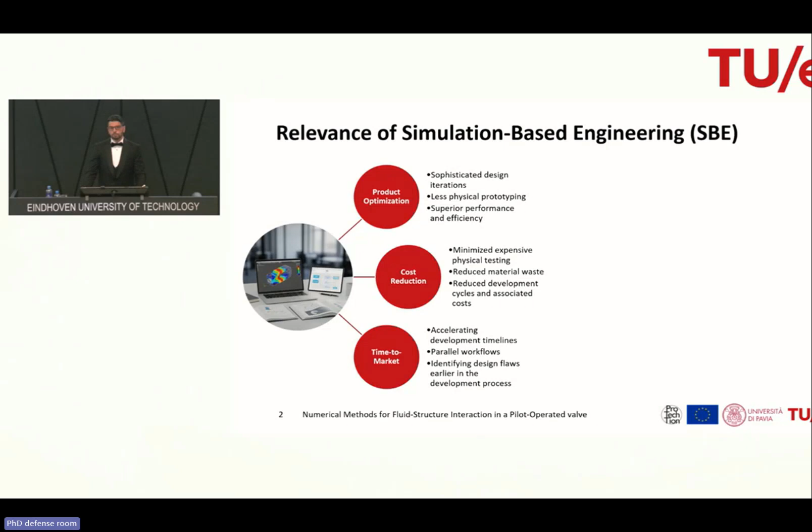Simulation-based engineering has transformed industry by complementing research and development with powerful computer simulations. It allows us to optimize products, reduce costs, and shorten time to market. Its impact on the technology and the economy has been increasingly profound thanks to the evolution in computing capabilities, the emergence of data science and AI tools, and the development of sophisticated data analysis software.

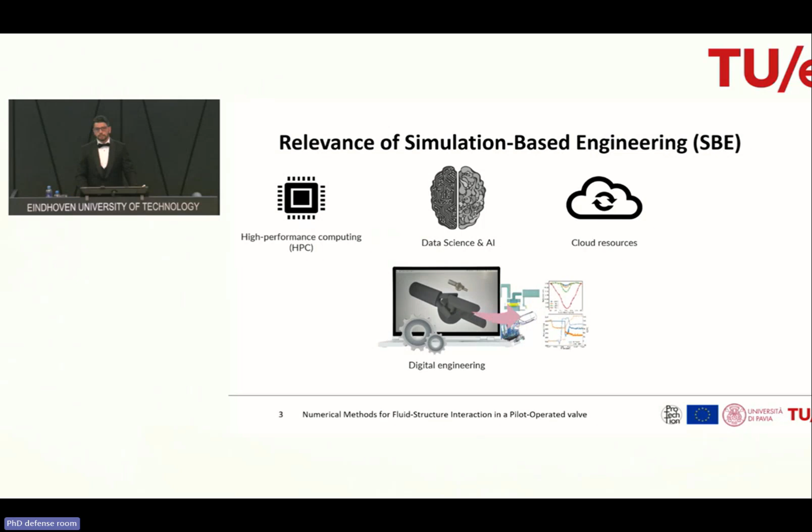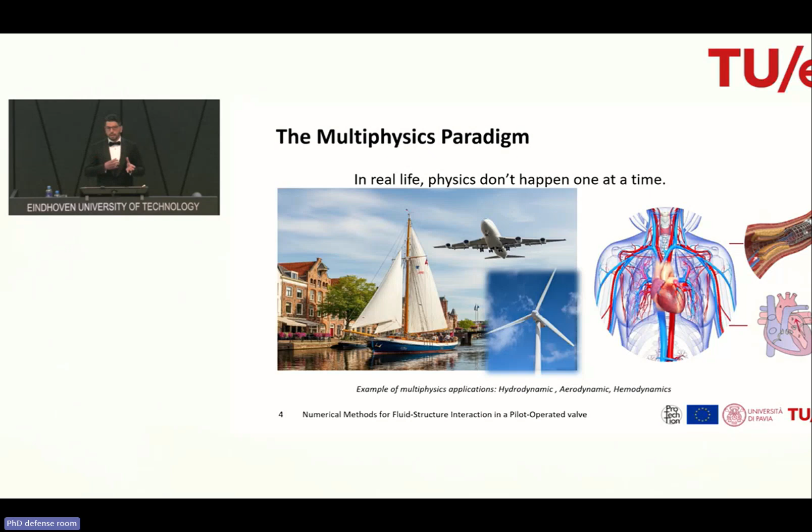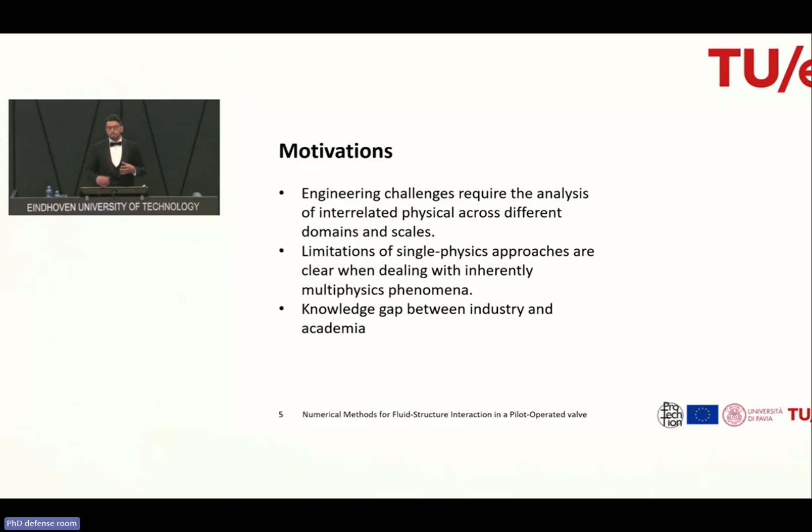However, while it's mature for single physics problems, its potential in multi-physics applications is still not sufficiently exploited. Integrating different physics, such as fluid dynamics and structural mechanics, poses unique educational, technological, and organizational challenges. The limitations of single physics have become increasingly evident as researchers tackle complex problems in fields like hydrodynamics, aerodynamics, and hemodynamics. Moreover, there is still a significant knowledge gap between industry and academia in applying these complex simulations. For all those reasons, my PhD was part of a broader European initiative to bridge this very gap.

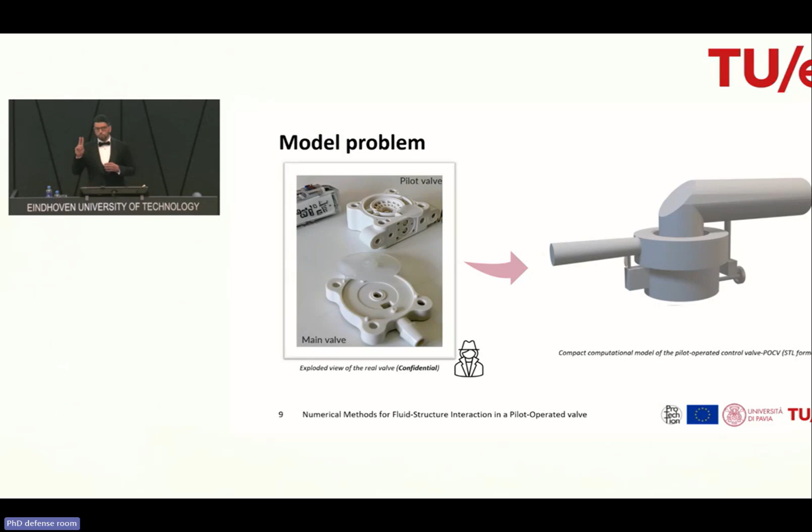My research focused on a specific complex multi-physics application, a microfluidic pilot-operated control valve, or POCV for short. In this valve, a pilot region controls and actuates a main larger valve using a shape memory alloy actuation mechanism integrated within an electronic device. Its development intends two modes, the proportional and the on-off mode, making it an attractive option for tasks like dosing, dispensing, and mixing. This tiny, high-tech component is critical in fields requiring precise fluid delivery, from medical diagnostics to food and beverage industries.

However, while this valve is working perfectly fine in the on-off mode, it failed completely under the proportional control mode. It experienced severe vibration, making it unstable and unusable for its intended purpose. This raises the following questions. Where does this vibration stem from? And can we use numerical methods to address it?

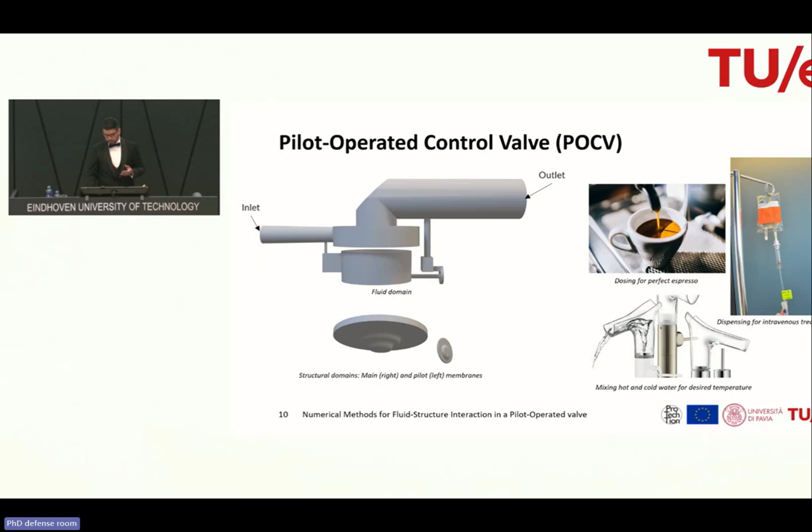To answer these questions, I set twofold objectives. Objective one consists of the development of suitable numerical methods that can faithfully simulate the fluid, structure and contact interaction within the POCV. Objective number two consists of leveraging these numerical methods to understand and potentially mitigate it.

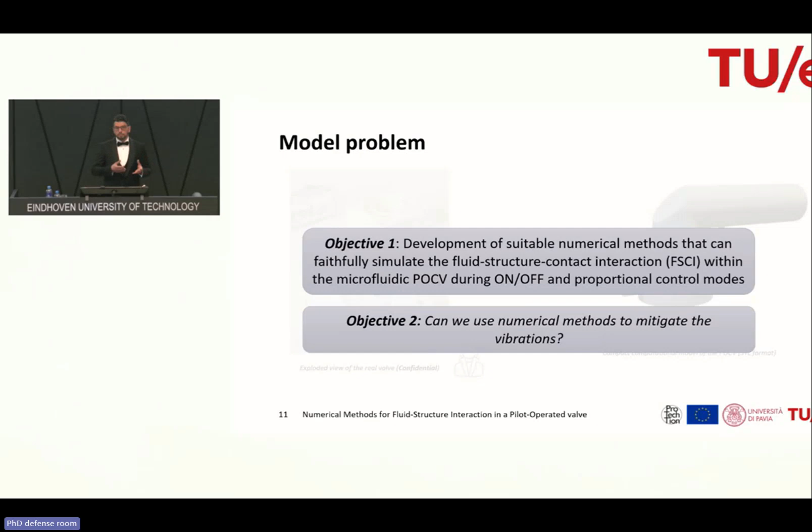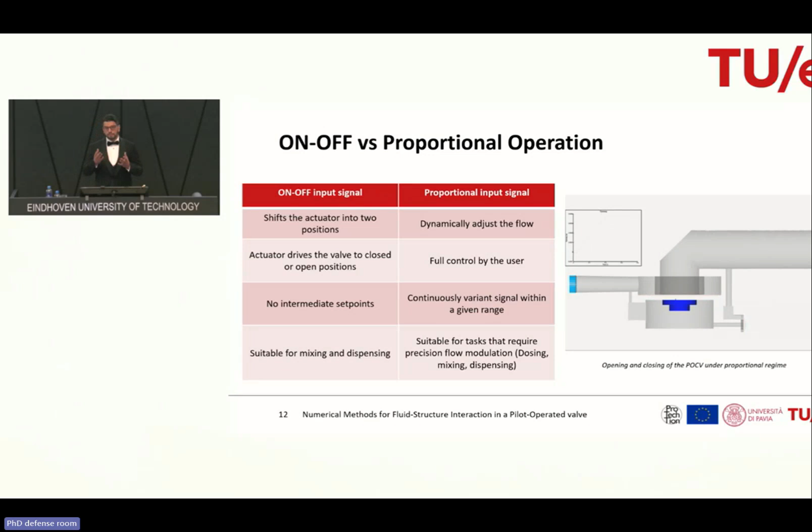Now, first, let's clarify the difference between the on-off and the proportional control. You see, the principle is quite simple. As the pilot valve opens, it releases pressure, creating a pressure imbalance between the main and pilot regions, thus opening the valve. For the proportional control, a continuously varying signal dynamically adjusts the flow as desired by the user. Hence, the valve can occupy any position between the fully open and the fully closed set points.

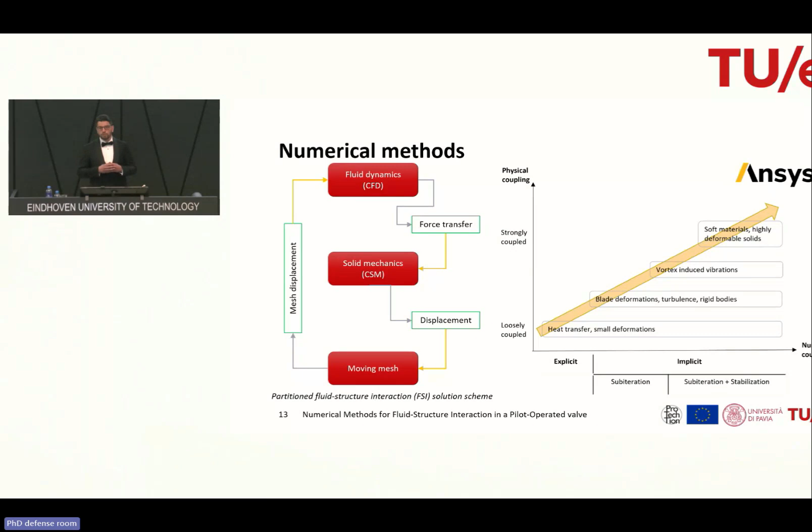For my investigations, I developed a numerical model using a method called the partitioned fluid-structure interaction approach, or FSI for short, within the ANSYS software suite. This came with big challenges, as this method had to account for the strong coupling between the fluid flow and the large structural deformation, as well as the contact between the membrane and the valve seat, not to mention the high computational cost associated with simulation runtime and the post-processing of hundreds of gigabytes of data.

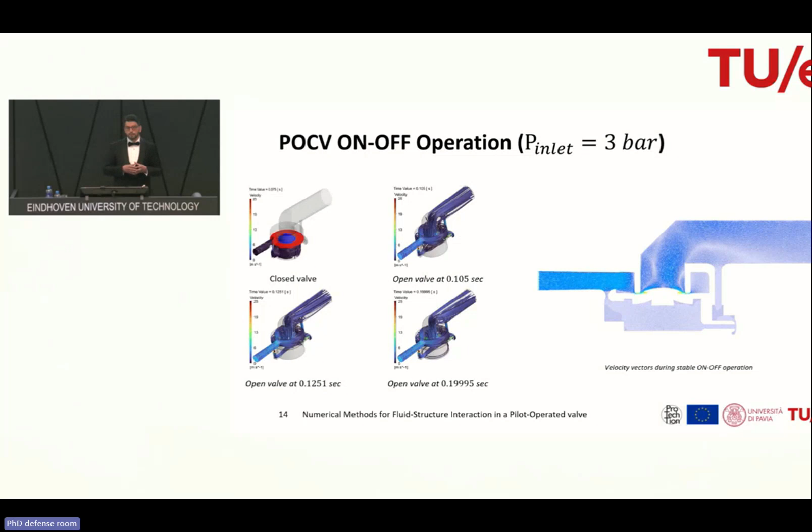My model first validated what was observed experimentally. In the on-off mode, the valve worked flawlessly, and my computational results were aligned with experimental data. But when I simulated the proportional opening, the failure was immediate. As soon as the valve tried to open partially, it started to oscillate violently.

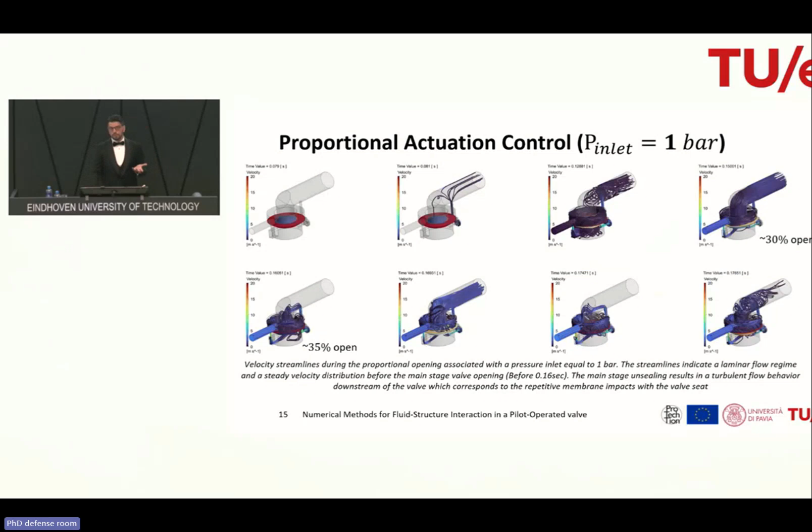Simulation could see what experiments couldn't. The instability was caused by a Venturi effect in the narrow gap of the partially open valve. To put it simply, as the fluid rushes through this narrow gap, its velocity increases, creating a sharp pressure drop. This low pressure at the vicinity of the valve seat sucks the membrane back down, closing the valve. The pressure then builds up again, pushing the valve open, and the cycle repeats, leading to this self-sustained vibration.

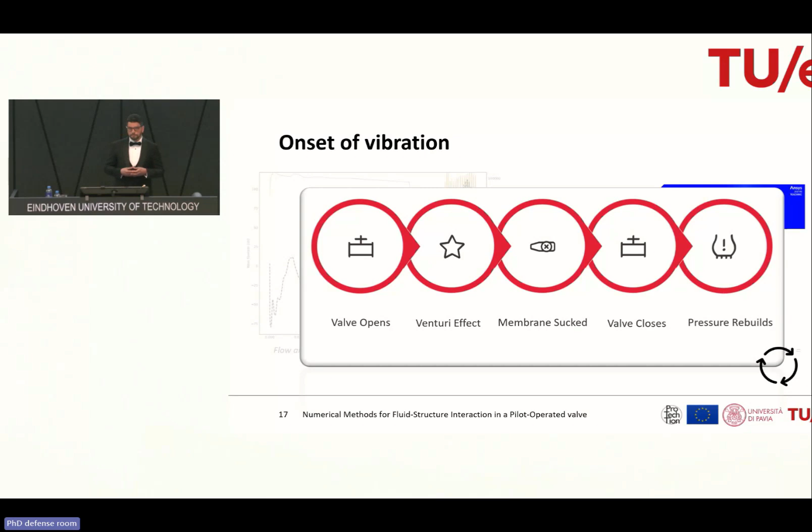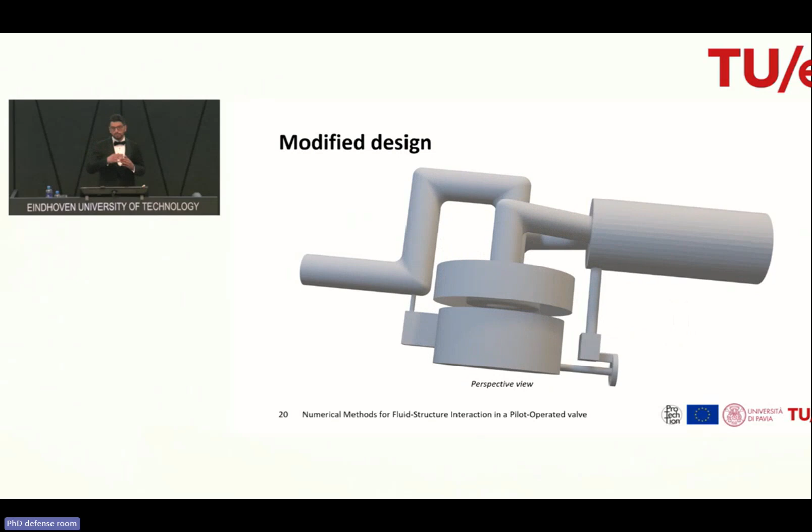With this understanding, I proposed a new design of the valve. The main idea was to reroute the flow in such a way that instead of flowing almost tangential to the main membrane, the inlet is now perpendicular to it. This change, alongside the change in the valve seat geometry, was intended to mitigate the vibration. After several trial and error procedures, I improved the design and ran similar FSI simulations. From a computational perspective, the results were promising. The vibrations were gone, but the overall performance of the valve has also improved.

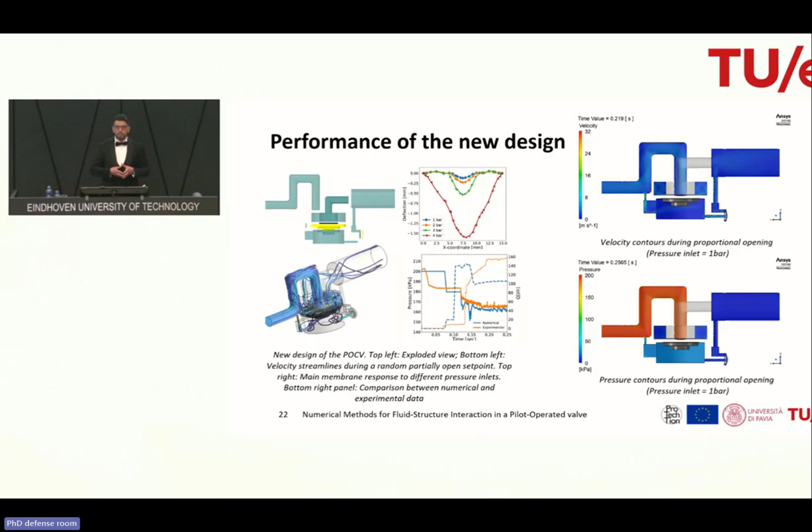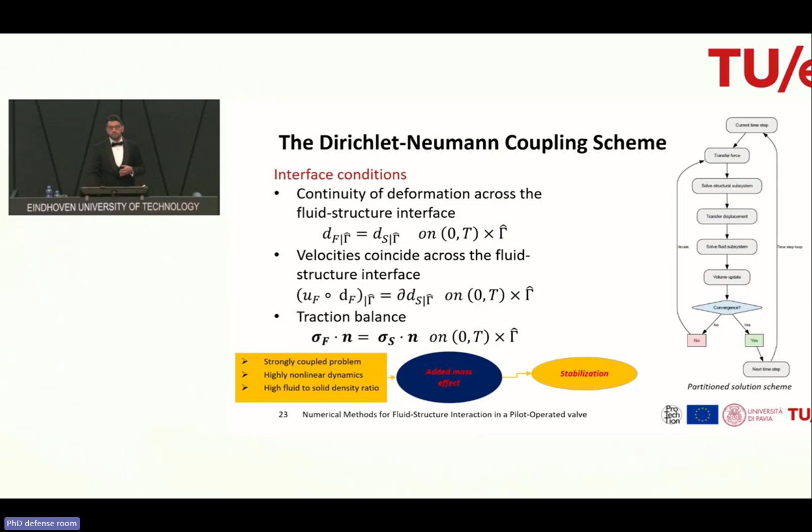During this process, I kept running into a puzzling numerical issue. You see, the partitioned approach that I use is based on the Dirichlet-Neumann coupling scheme, which stipulates the continuity of motion and the continuity of traction across the fluid-structure interface. This coupling scheme is known for its limitations for strongly coupled problems, but it also tends to fail for large fluid to solid density ratios, which require stabilization techniques for convergence. Although we addressed all these limitations, my simulations kept failing when they shouldn't have. This led to a deeper investigation of the numerical methods themselves. Such an investigation became an integral part of my thesis and led to a significant contribution to the field.

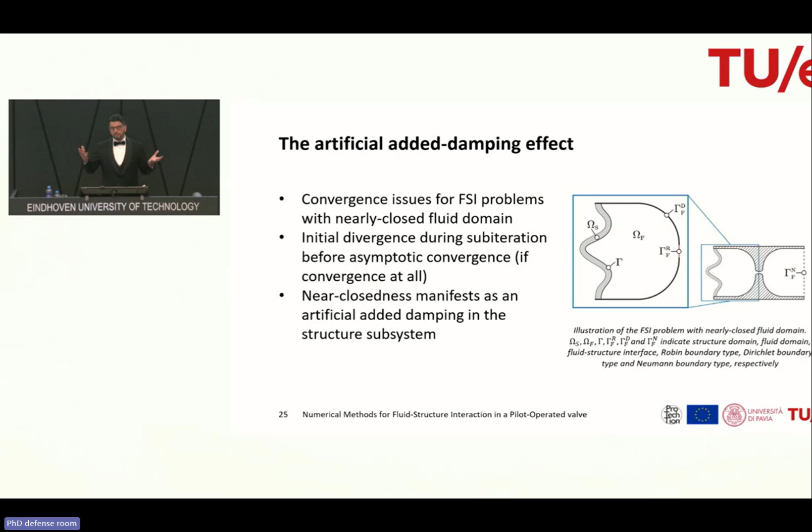We discovered that the Dirichlet-Neumann coupling scheme, which is used by most FSI solvers, introduces a hidden artifact in the nearly closed fluid configuration. To explain it simply, the high flow resistance in the narrow gap acts like an artificial damping force, which is not physical, but can deteriorate the entire calculation. Our investigation suggests that this added damping effect is proportional to the time step size, is proportional to the flow resistance, and is inversely proportional to the solid mass.

I believe that this finding is crucial for the FSI community, as it provides for the first time the last missing piece regarding the limitations of the Dirichlet-Neumann coupling scheme. That is, I believe in the future, once addressed, FSI problems involving contact and nearly closed fluid domains could be solved.

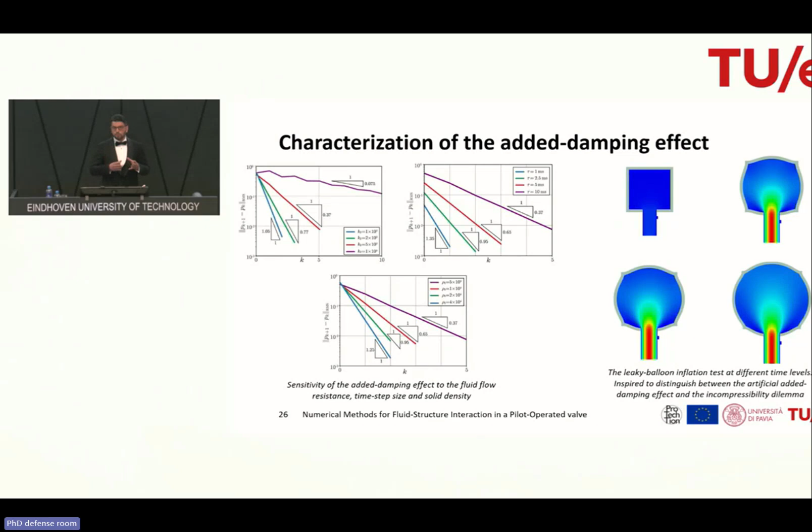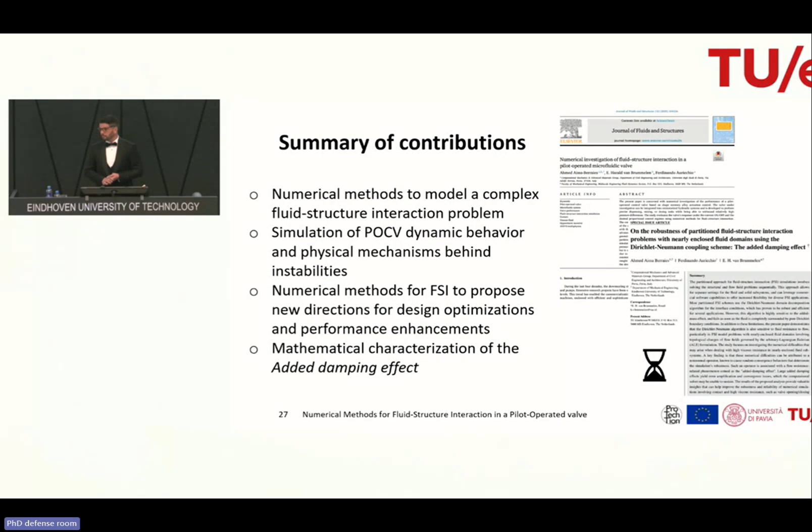Geachte promovendus, thank you very much. Yes, I'm satisfied with your answer. The Eindhoven University of Technology appreciates it very much when experts from abroad want to participate in PhD defense committees. We are therefore very much obliged to Professor De Tullio from Polytechnic Institute of Bari, to Dr. Conti, University of Pavia, Professor Degroote from the University of Ghent, Professor Behr from the University of Aachen. And to complete this round of introduction, on my right side is the first promoter, Professor van Brummelen. On my left side, Professor Kuerten from TU/e as well. He serves as the secretary of this committee. And on the very left, Professor Auricchio, also University of Pavia, and he serves as the second promoter today.